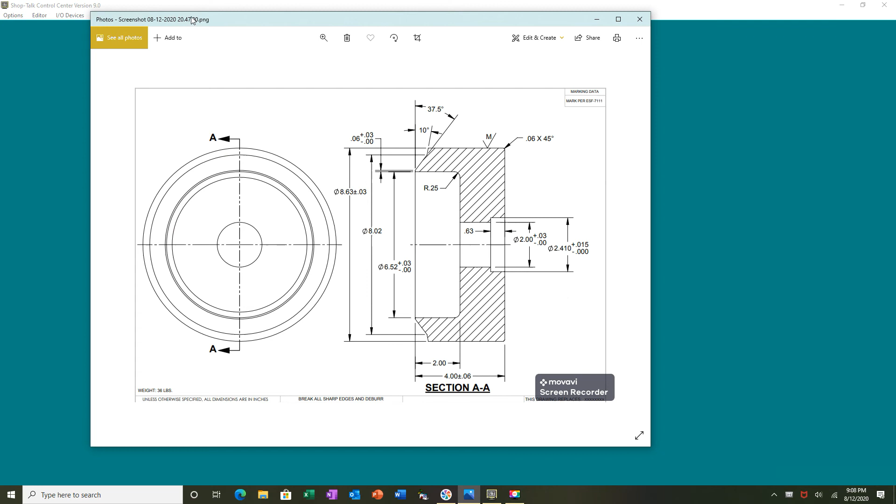Okay, this is going to be my first demo program tutorial. In order to do a tutorial, you got to have a print. So I'm going to be bouncing around over here to a print. Right here. And I'm going to store it on my screen right here. And if you have a way of screen capturing that, it might be nice that you can screen capture that and print it out for yourself so that you can kind of follow along on it.

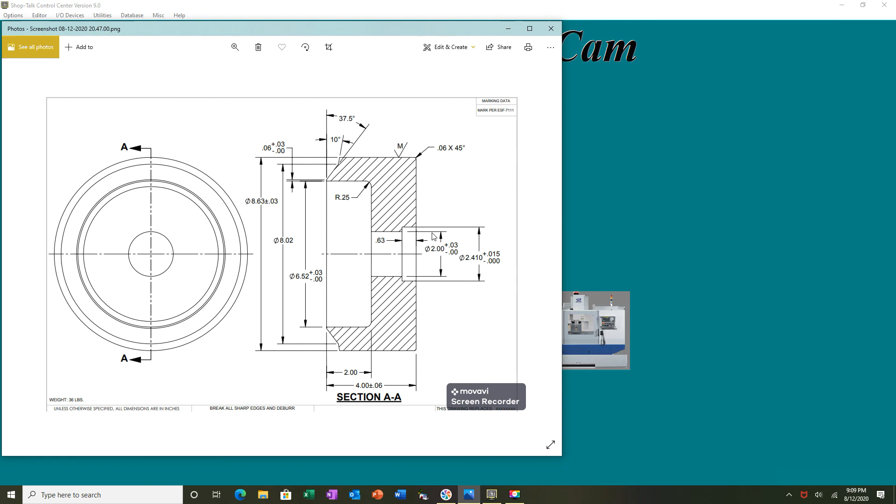But what we're going to do is we're going to make this point right here 0, 0. We're going to machine this whole end and this bore and all of this straight through right here, just to give you a little demonstration of how to do it. So let's get started. The first thing you're going to do is start by clicking on the lathe to begin running and launch the Lathe Cam product.

And it's going to come up with just a blank screen. Over here on the right hand side is all of your icons. As you notice, the only one that's lit up is the material, and that's where you're always going to start. It's the only thing that's lit up that you can choose. So you'll select the material. And there is a quick screen over here that gives you a little picture box of how you're going to chuck this piece of material and all of the questions, kind of like the shortcut mode. What you really want to do is look down here at the bottom left hand corner and read the question down here and then answer the question in the little box right there.

So I'm going to pull up the little picture over here again, and I'm going to look at this. It shows that it's at 8.63 diameter, this biggest diameter. So we're going to say we're going to make this part out of a piece of 1018, just mild steel, and we're going to say that the material is 8 3/4 diameter is what we're going to purchase for this.

So I'm going to come back over here, and the first thing is how much material is sticking out past the chuck jaws. Well, I'm going to say, for instance, I'm just going to stick it out, let's say 3 inches. How much are you going to chuck on? Let's just say I'm going to chuck on 1 inch of material. And the material OD is going to be 8 3/4. ID will be 0. We're going to face off about 100 thousandths. The chucking type is going to be a 1 OD or 2 ID or 3 collet, but I want to use step jaws. So I'm going to enter it as a -1.

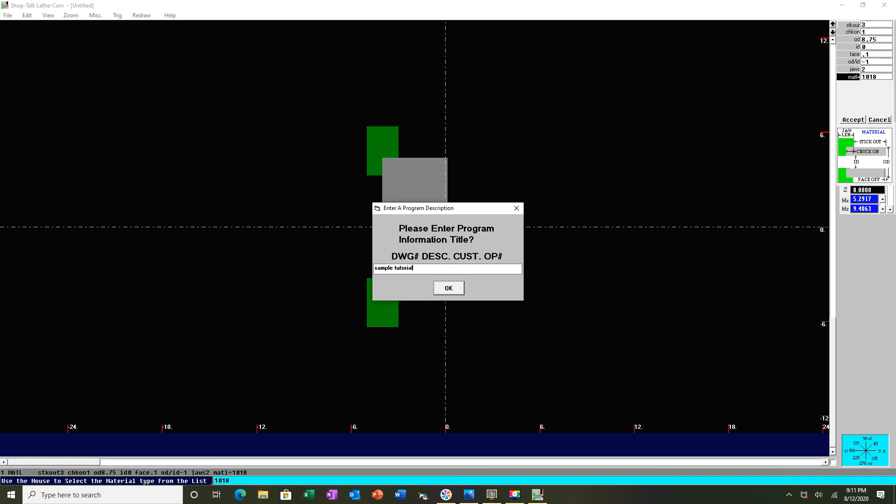And then what is the length or height of your jaws? We'll call them maybe 2-inch tall jaws. And then we're going to select over here a type of material. We'll just go with 1018. It's going to throw that little screen up here, and then from here we're going to type in a description of something. I'm just going to type in sample tutorial program, operation number 1.

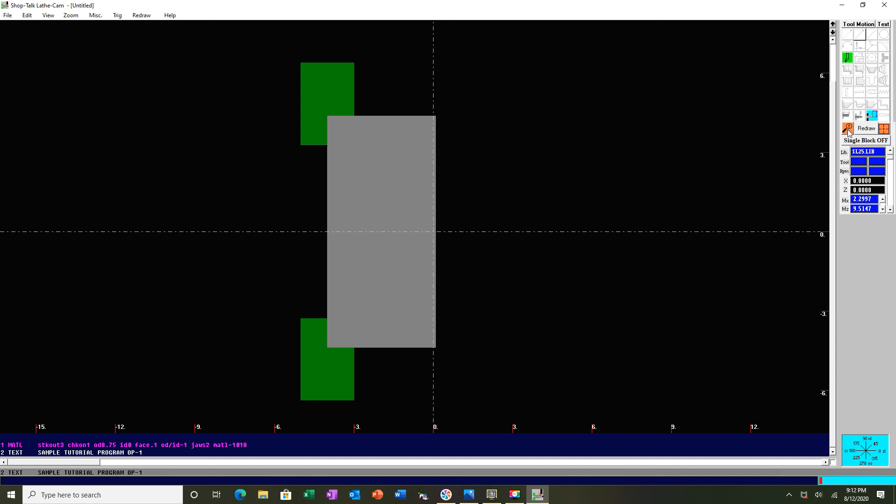And now we're going to have a piece of material chucked up, and you can zoom this up multiple ways. You can just take the mouse, put it where you want it, hold the left mouse button down and drag it diagonally, and then release it and it will zoom in. Also, there's an icon over here on the right for magnifying. If you hit the right mouse button when you click on it, it will zoom down. If I hit the left mouse button, it will zoom it up. So I can actually zoom it up and down just by clicking the little mouse button right there. From there, I want to do a face and turn operation.

So I'm going to select my tool change command, and I'm going to come up and pick a CNMG style tool with a 1/32 radius, and I'm going to select OK. And I'm going to go through the questions: the tool number, offset number, tip type 3, starting diameter, let's just call it a 10-inch diameter, and 8 inches, 1/32 tool radius, the max spindle speed, maybe I want to limit it to 1,000 RPM,

run it at 500 surface feet. I want the spindle direction to be forward. The work offset, I'm going to use G54, and the size of the insert of the tool, and a text comment. Now I have the tool sitting up right here. We're going to do a tool change. I need to get it down here somewhere so I can rapid it and face this off.

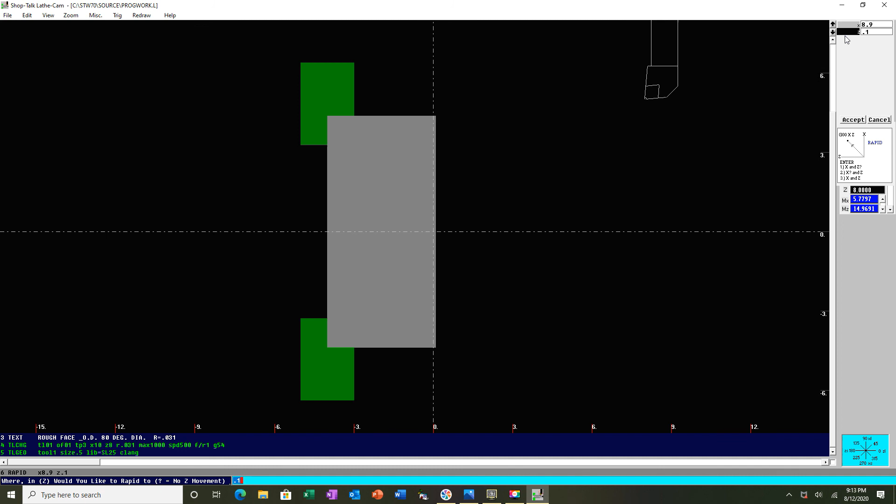To rapid, I'm going to use this very first icon. It's called rapid. So I'm going to select rapid, and I'm going to go to 8.9. Let's say that's above my material, and maybe 1 inch off the face, just to kind of get it up here somewhere above it. I'll zoom it up over here, and then from there I'm going to rapid it again, stay at the same diameter, and then move it over to maybe 100 thousandths off the face. So I can see that I'm above my part. I didn't crash into it. I'm a little bit above.

And now I want to do what's called a facing operation. This little guy right here is the simplest way to always face off your part. Just do what's called a quick face, and I can tell it that I want to use a canned cycle, and I want to face down to X0, Z0, no X stock. If I want to leave some stock on the face, now is the time I can tell it 5 thousandths, 10 thousandths, however much stock you want to leave on the face, and then what depth of cut you would like to take, and a feed rate. And it will face the part off.

Right over here to the right, there's a little scroll bar. This is your animation control on how fast the animation will be. I can drag this thing up or down and click the redraw, and you can see that I can slow the animation down so that I can actually see more of what it does. With this little guy right here, when it's all the way up, the graphics will be very fast, which is where you want it most of the time, but sometimes you want to slow it down to watch the details.

And from there, I want to do a rough turning operation. You have multiple types of roughing operations. One's a roughing boundary for face during a facing operation. Then you have a turning or boring operation. There's an undercutting operation, and there's an undercutting operation on the face of the part. I'm just going to do a simple rough turn or rough bore cycle. Rough turn. Again, I'm going to use a canned cycle. That means it's going to output usually a G71, like a Fanuc canned cycle.

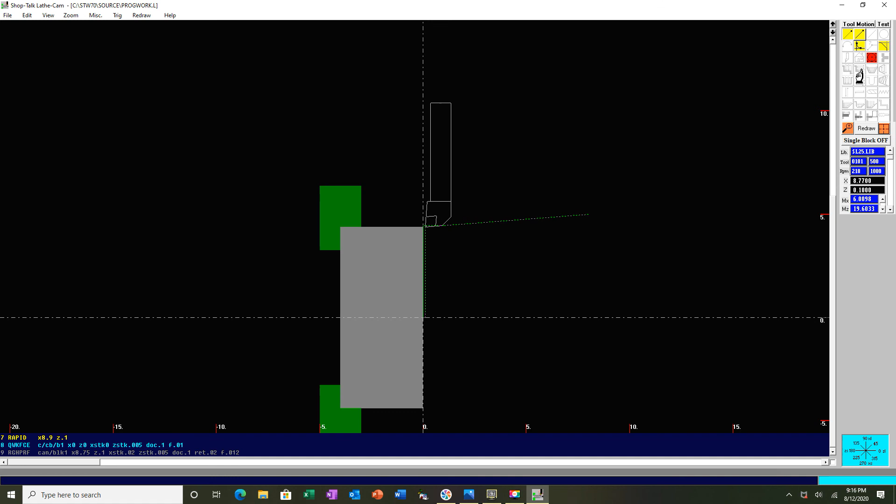And from there, I need to create my very first point. So in order to figure out my very first point, basically what you do is once you turn on the roughing cycle down here, you're just going to program the finished toolpath. That's all you're going to do. Show it what the finished part looks like, and then it's going to rough it in. So if I was to go back and look at my picture, if I was to look right here, I can't. Oh, yes, let's zoom it up a little bit.

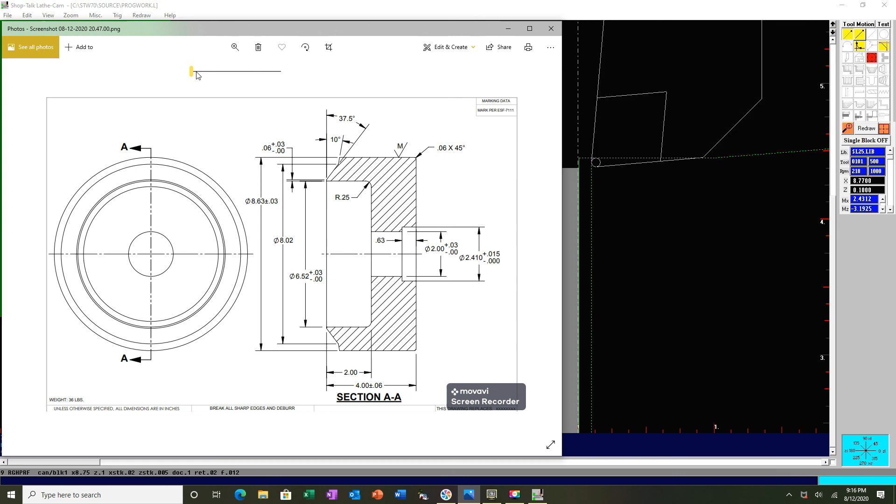You can see right here, my first point is going to be right there. Okay, well, that point right there, the X value is going to be this dimension right here plus its tolerance. Okay, plus this dimension right here plus its tolerance. Well, this tolerance here would be 60 plus half of that would be 15, which would be 75 thousandths. Okay, in diameter, that means this point is 150 thousandths in diameter, bigger than this dimension right here.

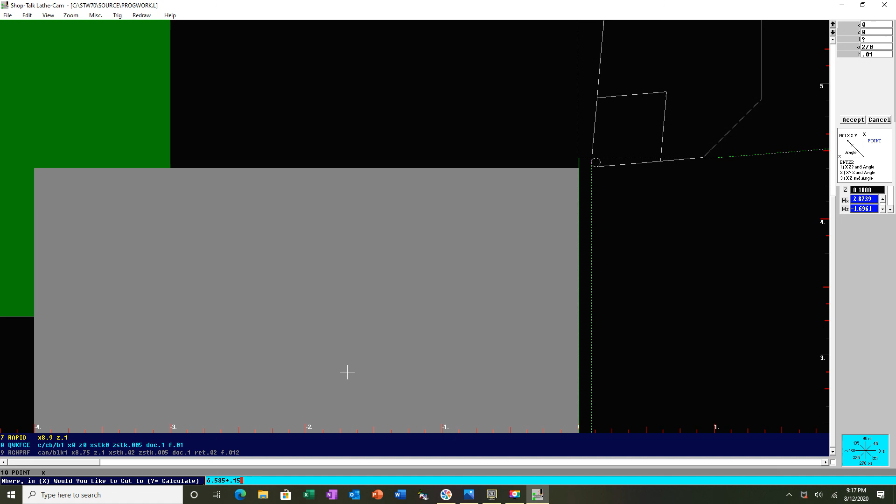So that starting point is going to be 6.535 plus 0.150. So I'm going to come back over here, and I'm going to enter my first point. Okay, and I'm going to put this back up here, 6.535. I'm going to put in plus 0.150. It will actually do the multiplication, addition, subtraction all within this little window. If you just type it in and then hit the equal sign on your keyboard, it'll actually do the math for you. And then the first point will be at Z0. So it's going to drop down here, and that's my first point.

From there, I'm going to cut up here at an angle. And where does it say to cut to? Well, my next point right here is going to be this point right up in here. That next point is at 8.02 diameter. But you also see I don't know the Z value, which is perfectly fine. All I need to know is the angle, right? And the angle is right here, 37.5 degrees.

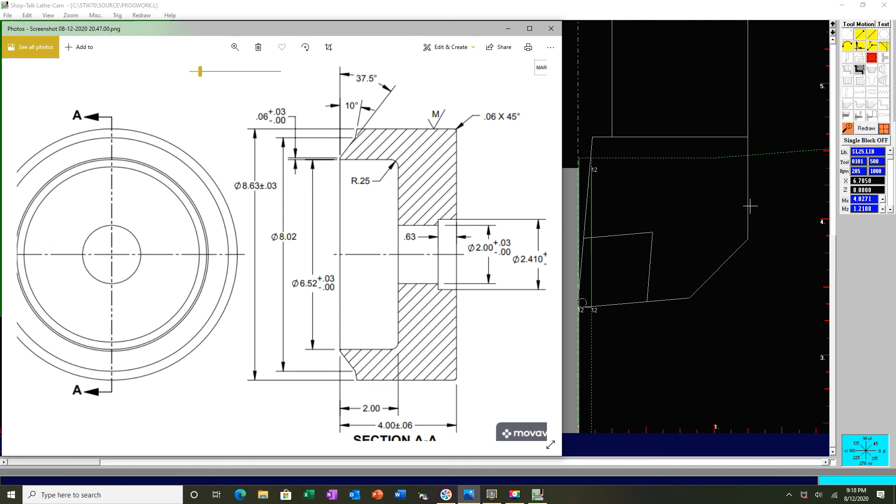So I'm going to go at 37.5 degrees until I get to this diameter right here. So I can just go up there and just tell it that. I'm going to tell it do a point to 8.02 diameter. The Z value, I'm going to put a question mark because the print doesn't give it to me. So I'm going to tell it I don't know by putting a question mark. And the angle, you have to drive the tool always by the compass.

So if I was going to go straight up, that'd be 90 degrees. I don't want to go straight up. I want to go 90 degrees plus 37.5. So I'm going to type it in. It's 90 plus 37.5, which equals 127.5, and add a feed rate. And you'll notice that it will calculate the Z value, and it throws it in the little window over here and tells you, well, the calculated Z point at that angle is minus 0.5122.

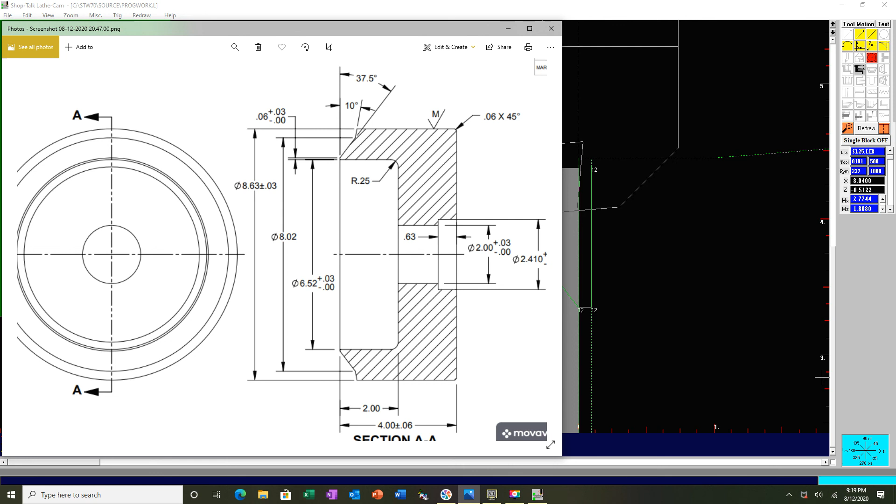So now I'm there. Now I got to continue up to this diameter at 10 degrees. So I'm going to go to 8.63 at 10 degrees. So I'm going to come back over here and do another point to go to 8.63. Again, I don't know it, so I'm going to tell it a question mark. This time I'm going to go at 100 degrees, which is 90 plus 10, and same feed rate. And now it will calculate what that point is.

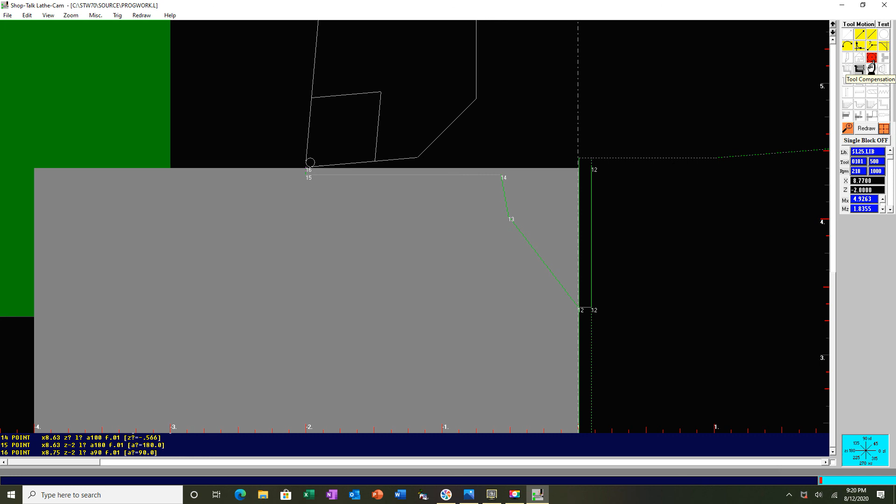And from there, I'm going to turn back some distance. I can just tell it a point at 8.63, and let's go minus 2 inches. And then I will move it up off the part, back to the top of my part boundary. And so I've created the path that I need to remove the stock from. First I want to see the tool comp. I'm going to click the little tool compensation guy right there. And then I'm going to select end the roughing cycle.

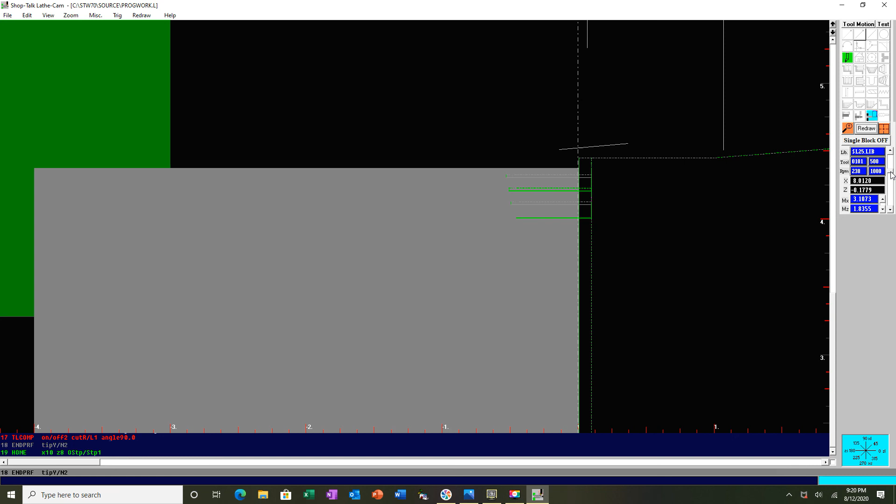From there, it's going to calculate the roughing passes, and I'm going to send that tool home. And to slow down the animation, do a redraw. Show my roughing passes. And there you have it. That's how to do a simple face and rough turning operation.